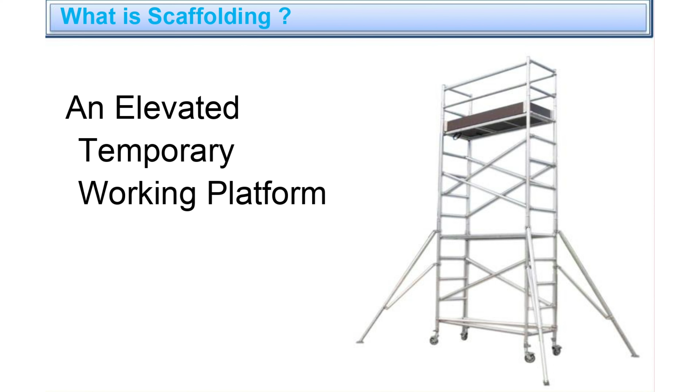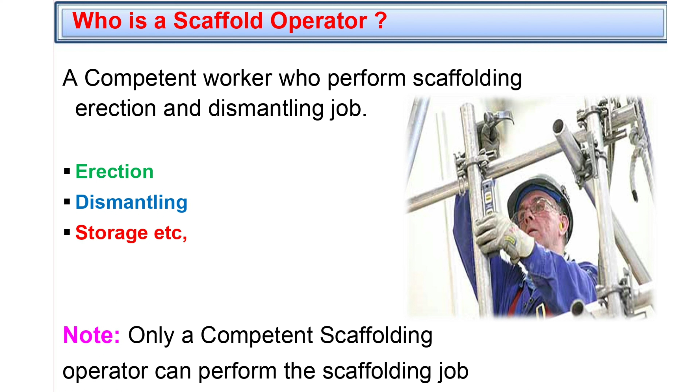Scaffolding training. What is scaffolding? An elevated temporary working platform. Who is a scaffold operator? A competent worker who performs scaffolding erection and dismantling jobs: erection, dismantling, storage, etc. Note: only a competent scaffolding operator can perform a scaffolding job.

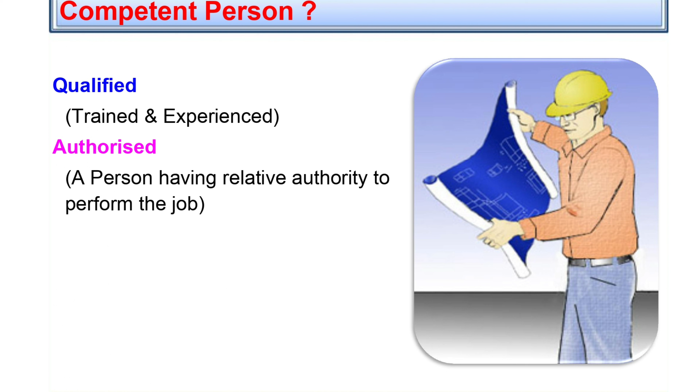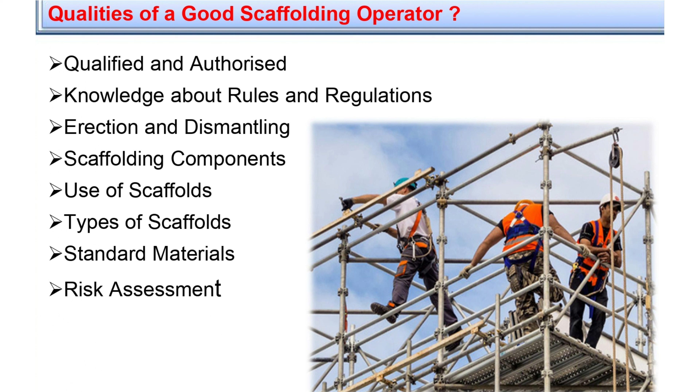Competent person: qualified, trained, experienced, authorized, a person having relative authority to perform the job. Qualities of a good scaffolding operator: qualified and authorized, knowledge about rules and regulations, erection and dismantling, scaffolding components, use of scaffolds, types of scaffolds, standard materials, risk assessment.

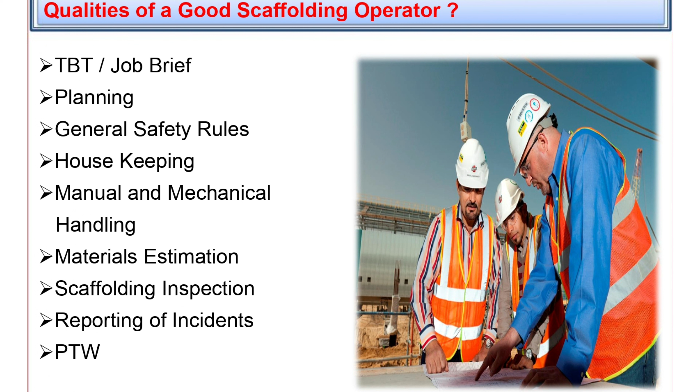TBT job brief, planning, general safety rules, housekeeping, manual and mechanical handling, materials estimation, scaffolding inspection, reporting of incidents, PTW.

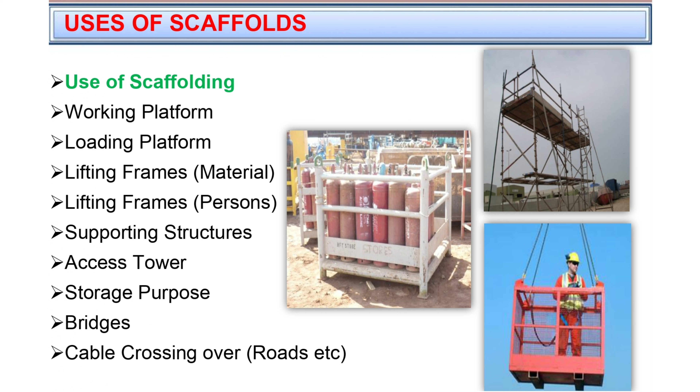Uses of scaffolds: working platform, loading platform, lifting frames for materials, lifting frames for persons, supporting structures, access tower, storage purpose, bridges, cable crossing over roads, etc.

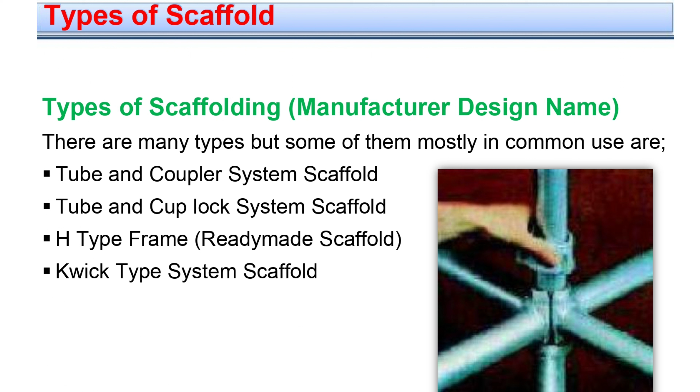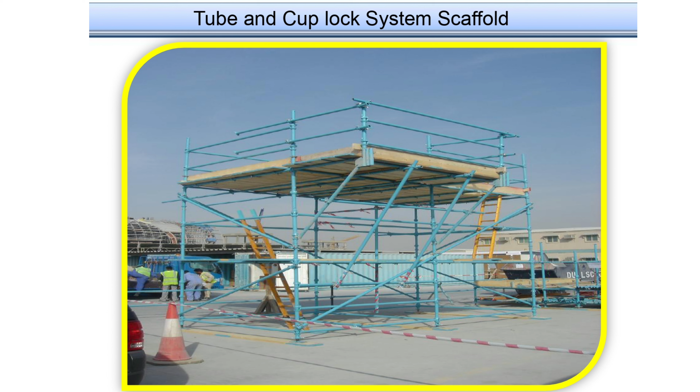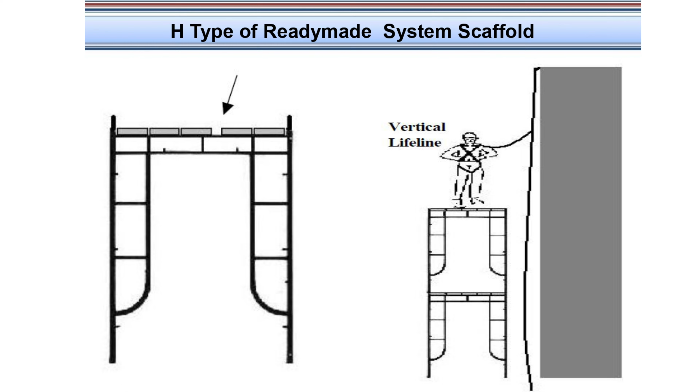Types of scaffolding, by manufacturer design name. There are many types, but some of the most common are tube and coupler system scaffold, tube and cup lock system scaffold, H-type frame ready-made scaffold, Kwick type system scaffold, tube and cup lock system scaffold, Kwick type system scaffold, H-type ready-made system scaffold.

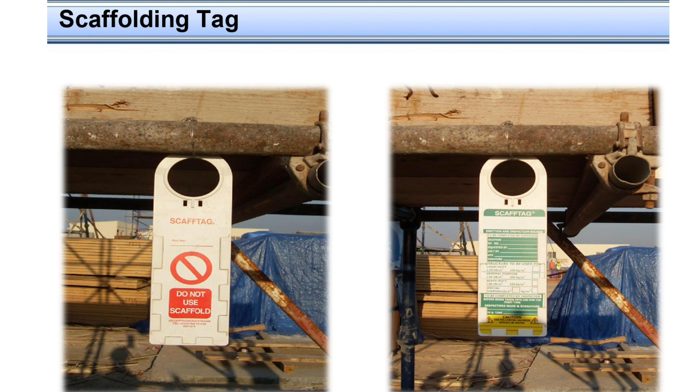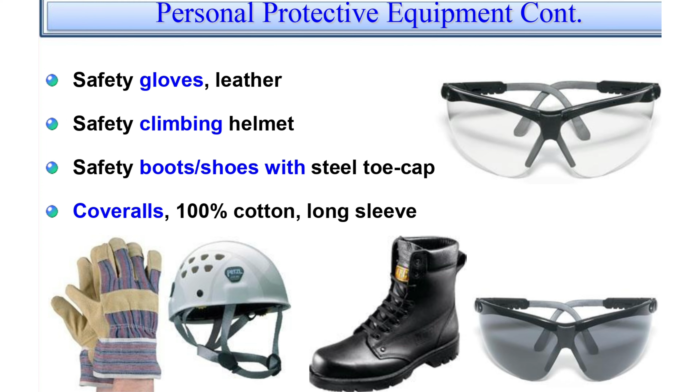Scaffolding weight. Scaffolding tag: red tag, green tag. Personal protective equipment: leather safety gloves, safety climbing helmet, safety shoes with steel toe cap, 100% cotton long-sleeve coveralls, ear protection, clear or shaded safety spectacles, tool pouch with appropriate tools. Fall protection: safety harness and fall arrestor.

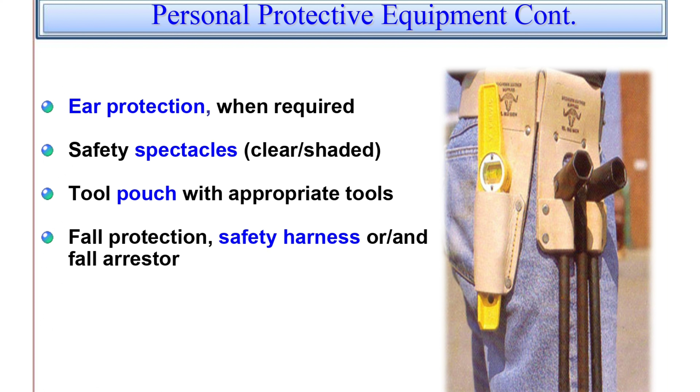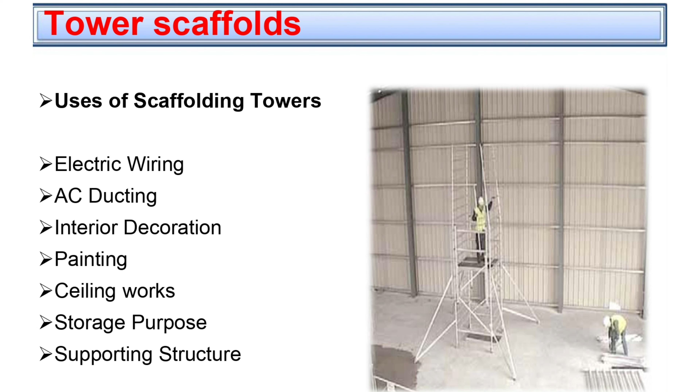Tower scaffolds. Uses of scaffolding towers: electric wiring, AC ducting, interior decoration, painting, ceiling works, storage purpose, supporting structure. Erection and dismantling: user manuals, which include the sequence of erection and dismantling, bracing, stabilizing requirements, ratio 1:4, PFAS, lifeline, fall arrestor, raker system.

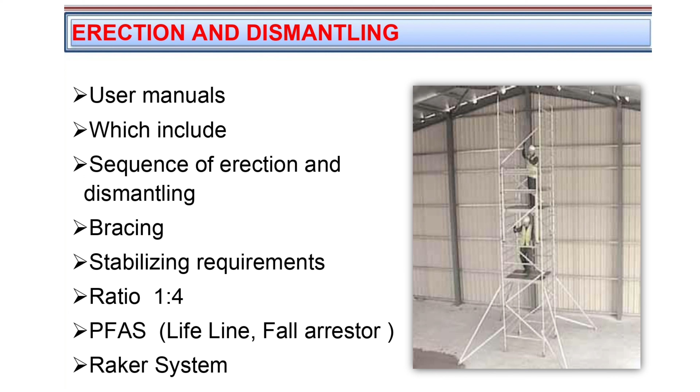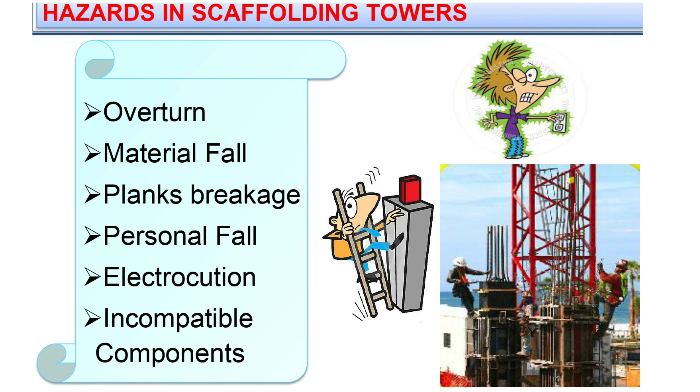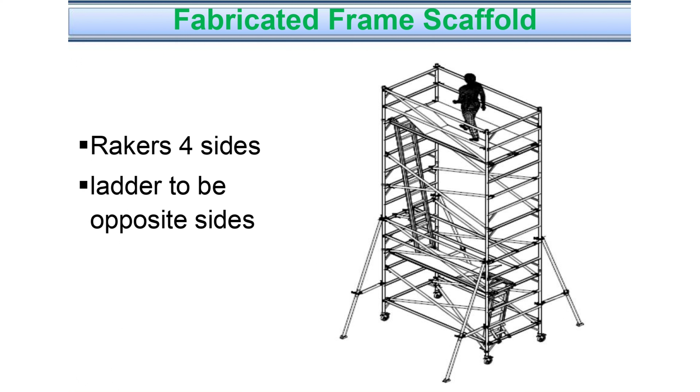Hazards in scaffolding towers: overturn, material fall, plank breakage, personal fall, electrocution, incompatible components. Fabricated frame scaffold: rakers 4 sides, ladder to be on opposite sides.

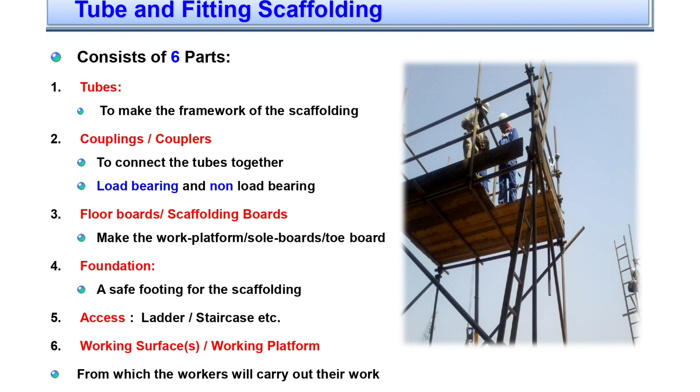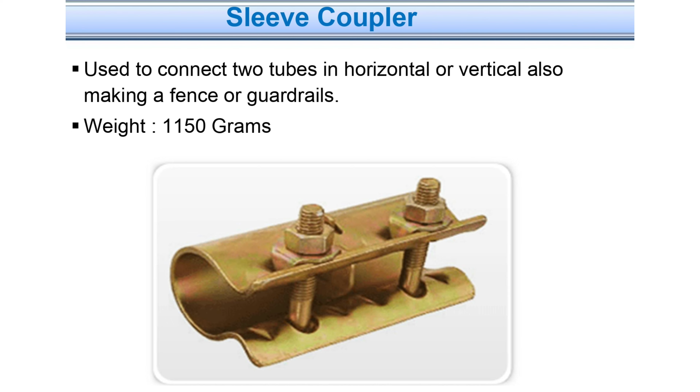Fixed right angle double coupler. Sleeve coupler, used to connect 2 tubes horizontally or vertically, also for making a fence or guardrails. Joint pin coupler, used to connect two tubes horizontally or vertically, also for making a fence or guardrails.

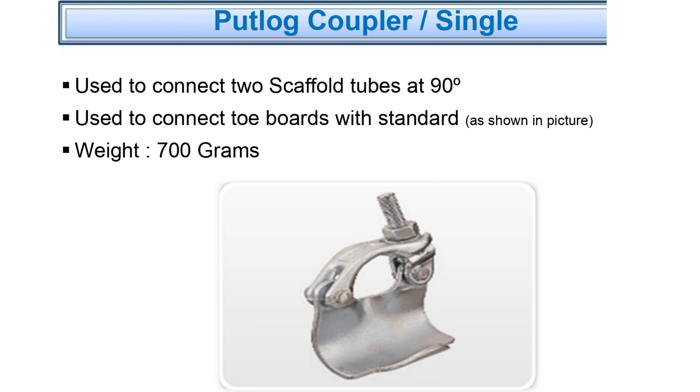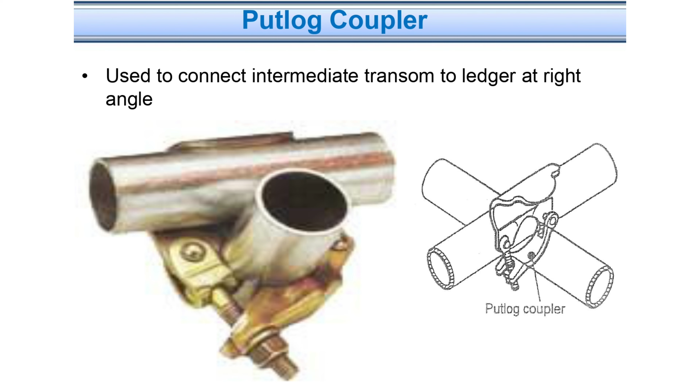Putlog coupler, used to connect two scaffolding tubes at 90 degrees, used to connect toe board with standard. Toe boards connected with standard. Putlog coupler, used to connect intermediate transom to ledger at right angle. Ladder clamp, used to connect a ladder to the support tube in scaffolding.

Scaffolding couplings: girder coupler, for connecting scaffold tubes to H-girders. Units must fix to girders in pairs. Refer to the manufacturer's recommendations for loading. SWL when used in pairs is 1.25 tons.

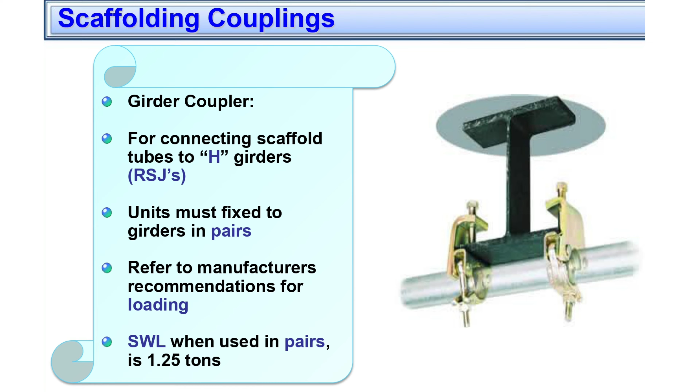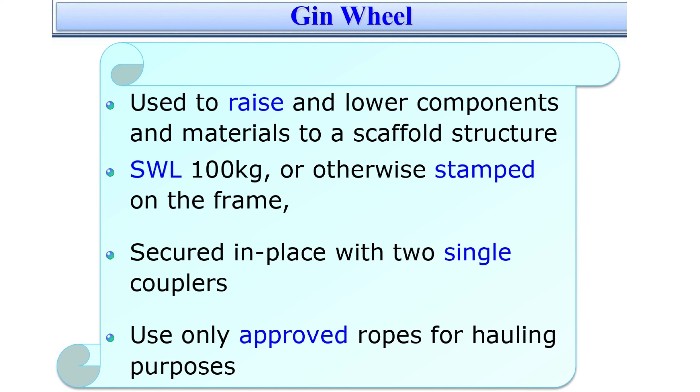Gin wheel, used to raise and lower components and materials to a scaffold structure. SWL 100 kilograms, or as otherwise stamped on the frame, secured in place with two single couplers. Use only approved ropes for hauling purposes. Board retaining coupler, BRC, used to connect scaffold boards with the tubes.

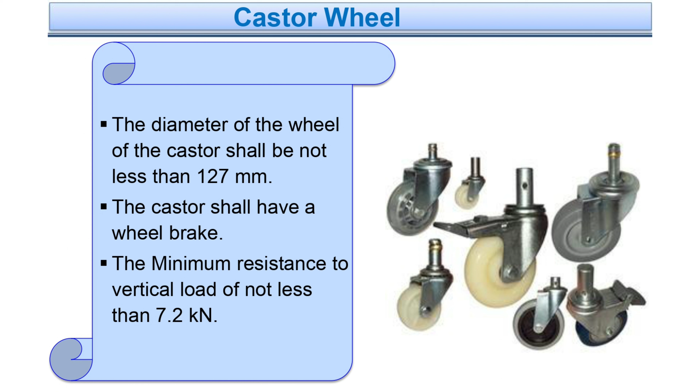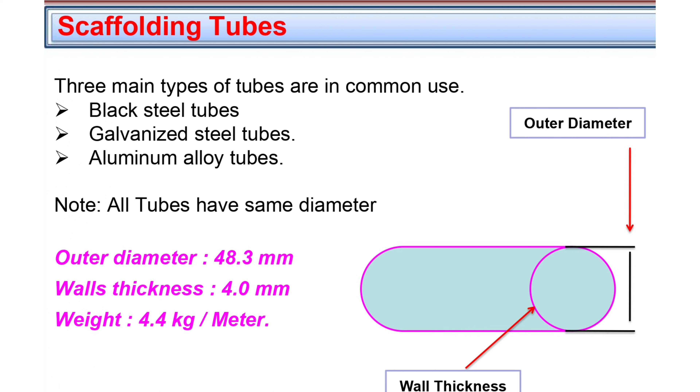Castor wheel: the diameter of the castor wheel shall be not less than 127 mm. The castor shall have a wheel brake, and a minimum resistance to vertical load of not less than 7.2 kN. Scaffolding tubes: three main types of tubes are in common use: black steel tubes, galvanized steel tubes, aluminum alloy tubes. Note, all tubes have the same diameter.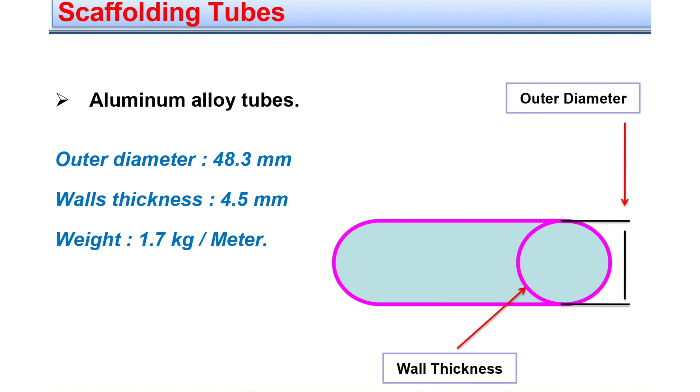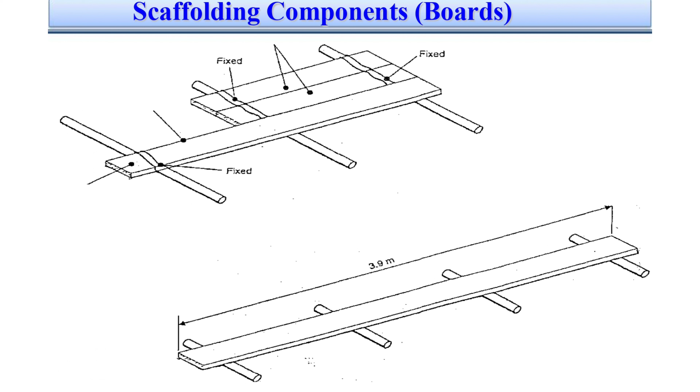Scaffolding components: boards. Usually the boards are made of wood called timber, that is why they are called timber boards. What is wrong here? Common faults in scaffolding boards.

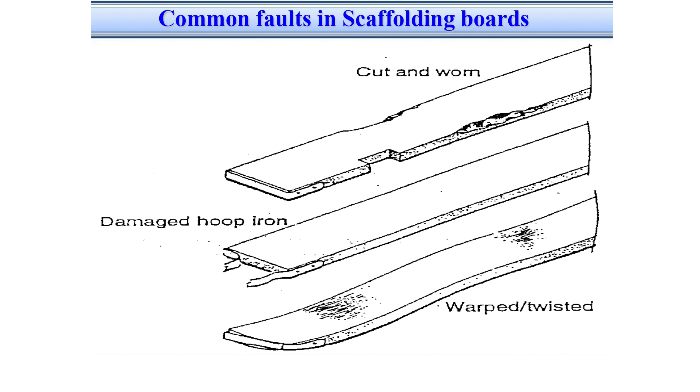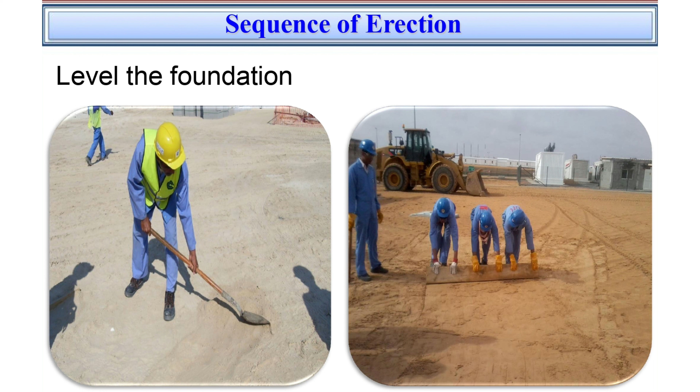Scaffolding toe boards. What is wrong here? Sequence of erection. Level the foundation. Base jack, sole board, base plate. Shank, base jack.

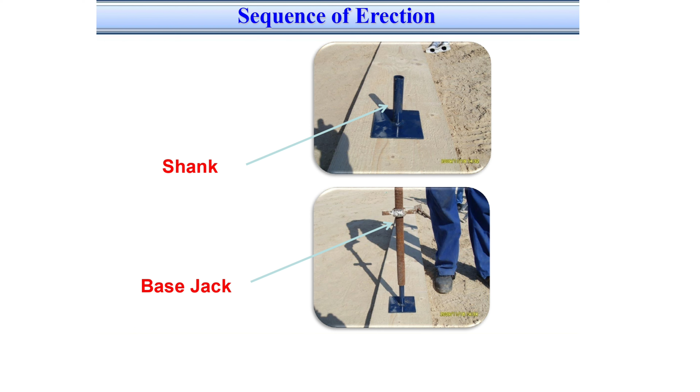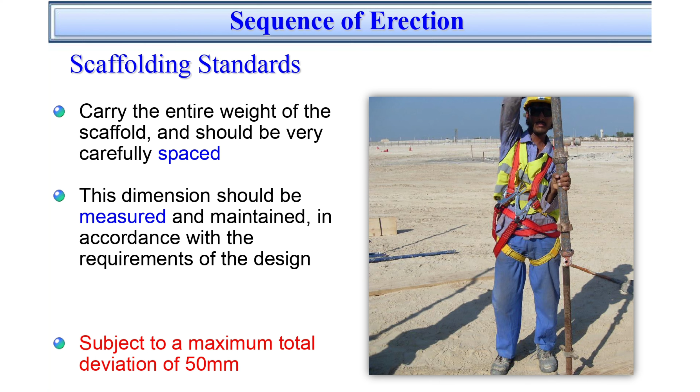Scaffolding standards carry the entire weight of the scaffold and should be very carefully spaced. This dimension should be measured and maintained in accordance with the requirements of the design, subject to a maximum total deviation of 50 mm. Ledger.

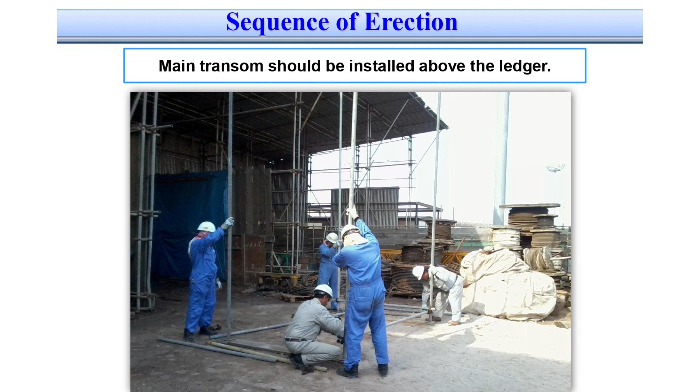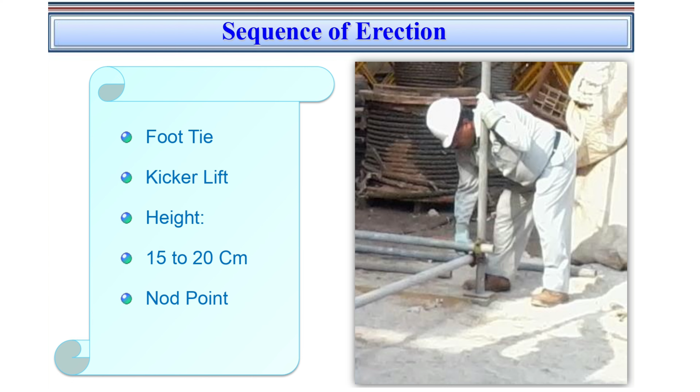Main transom should be installed above the ledger. Putting the main transom on fixed one, for correct matching. Foot tie, kicker lift, height 15 to 20 cm, node point. Fix the ledger over the earlier fix to match the correct position.

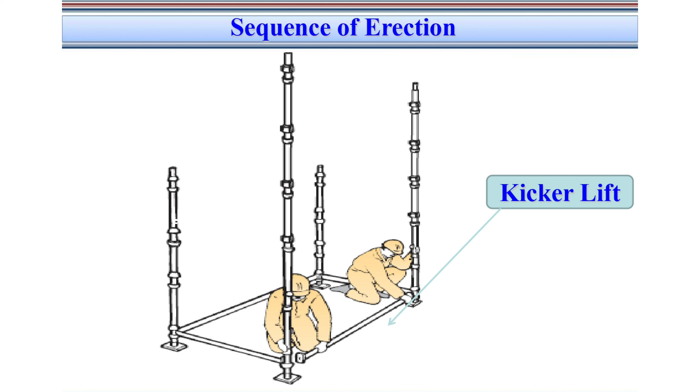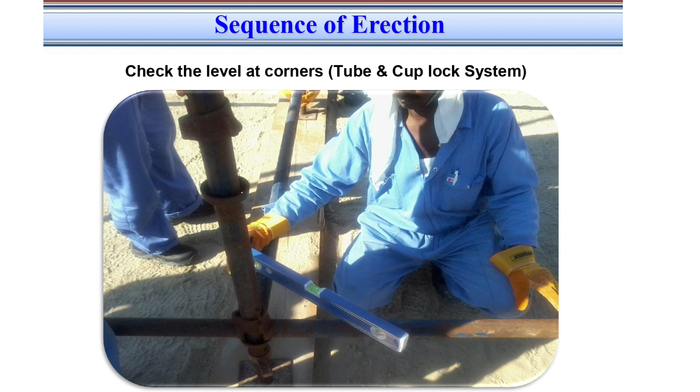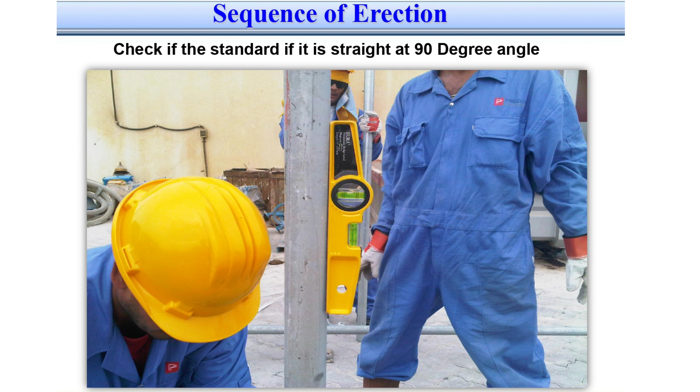Kicker lift. Maintain the foot tie height. Check the level at foot tie. Check the level at corners, tube cup lock system. Check if the standard is straight at a 90-degree angle. Alignment of standards.

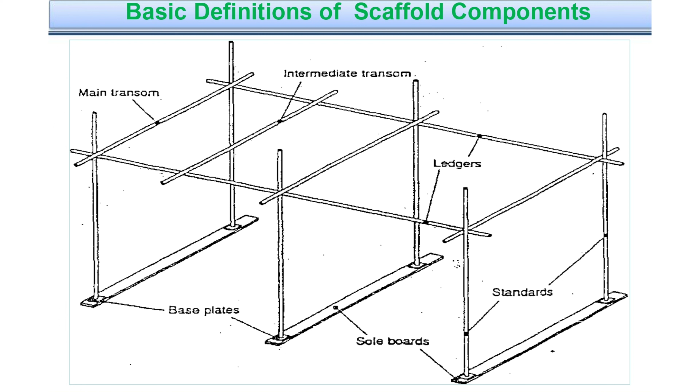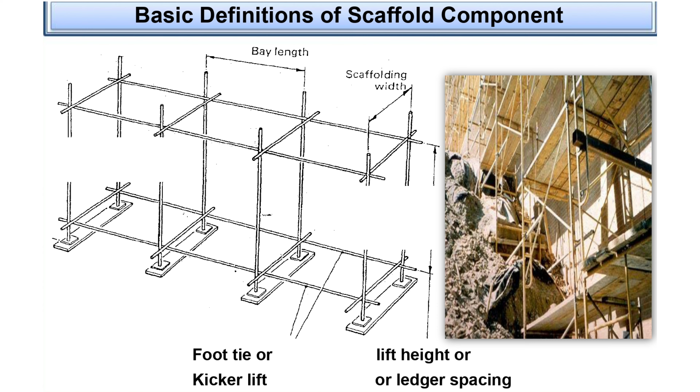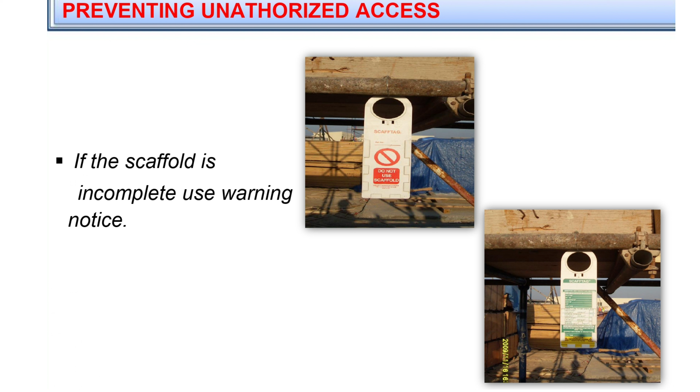Basic definitions of scaffold components: sole boards, base plates, standards, ledgers, main transom, intermediate transom. Distance between the foot tie and first lift should be 2 meters. Preventing unauthorized access: if the scaffold is incomplete, use a warning notice. Scaffolding ties.

Guardrail, approx 1 meter high, brick guard. Intermediate guardrail, max gap of 470 mm, toe board, scaffolding planks, deck area minimum of 600 mm wide, transom, sway brace, ledger brace, couplers at joints, ledger, standard, base plates, sole board, positive through tie, reveal tie.

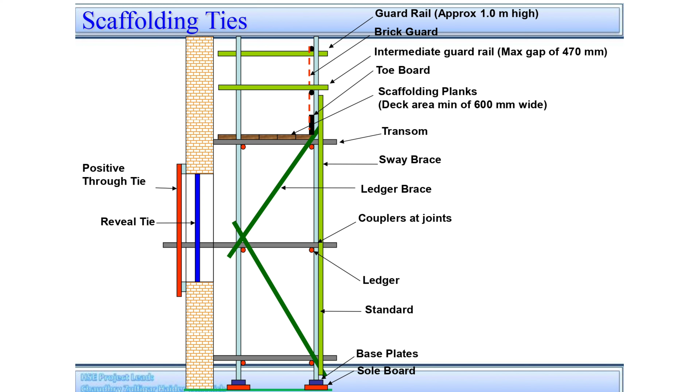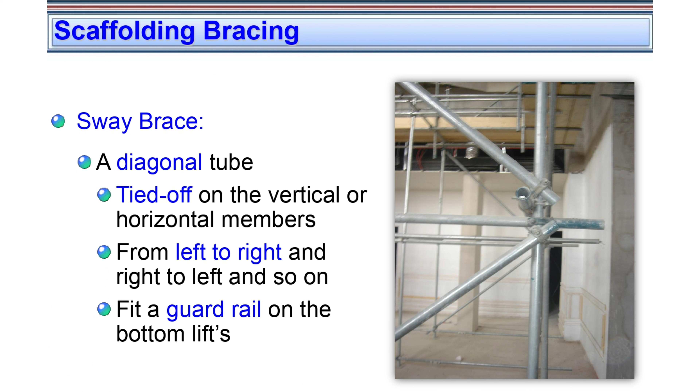Scaffolding bracing: sway brace, a diagonal tube, tied off on the vertical or horizontal members, from left to right and right to left and so on. Fit a guardrail on the bottom lifts.

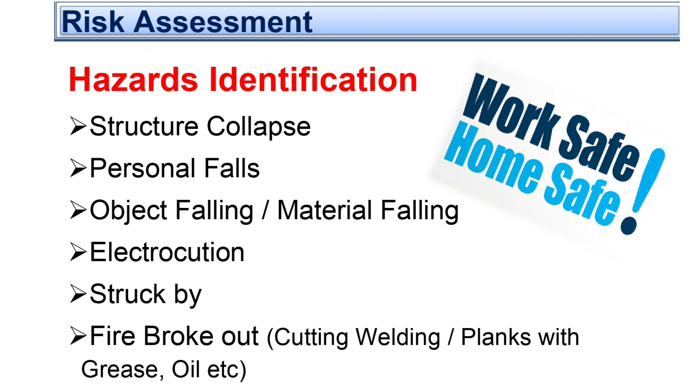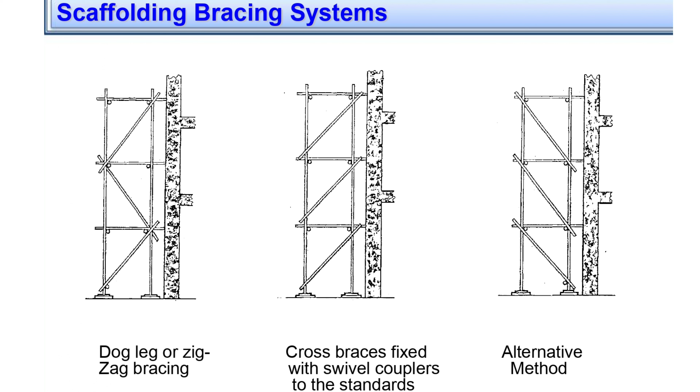Risk assessment, hazards identification: structure collapse, personal falls, object falling, material falling, electrocution, struck by, fire broke out, cutting, welding, planks with grease, oil etc. Scaffolding bracing systems: dog leg or zigzag bracing, cross braces fixed with swivel couplers to the standards, alternative method.

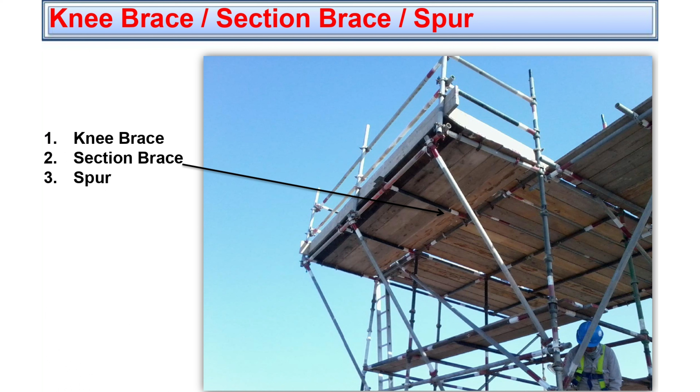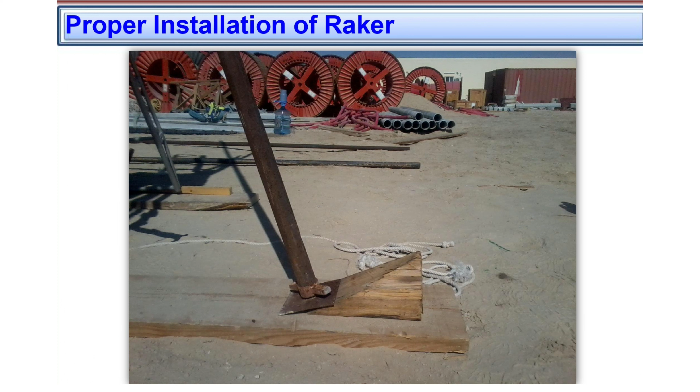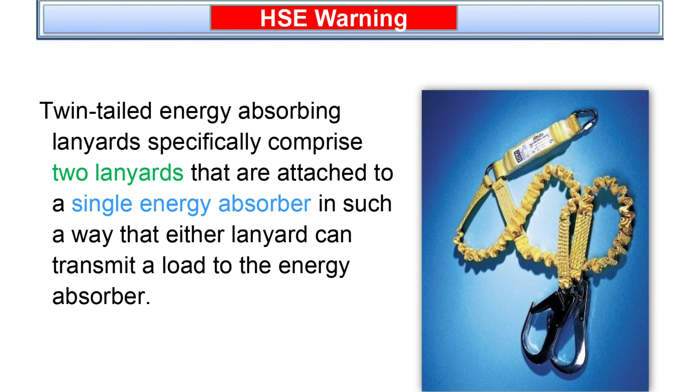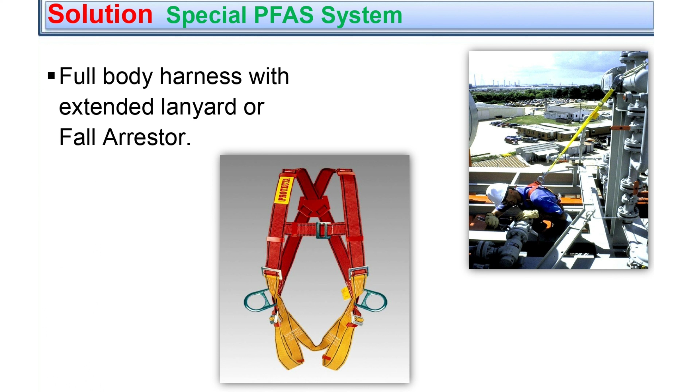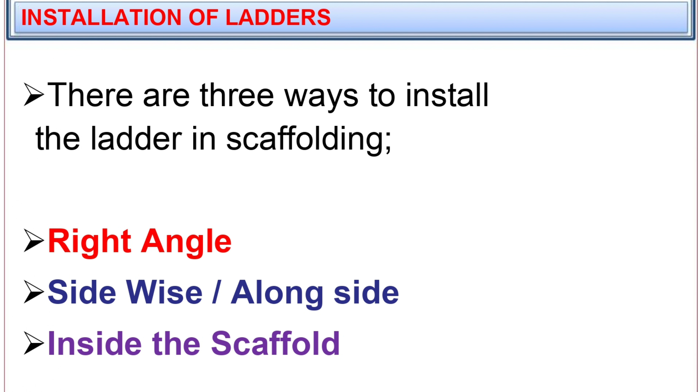Installation of ladders. There are 3 ways to install the ladder in scaffolding: right angle, sidewise alongside, inside the scaffold. Gangways and working platforms should ideally be horizontal, but may go up to 20 degrees without cleats; if steeper, cleats and guardrails should be installed.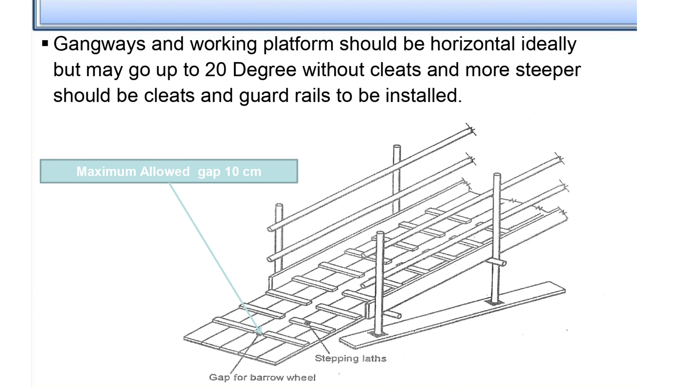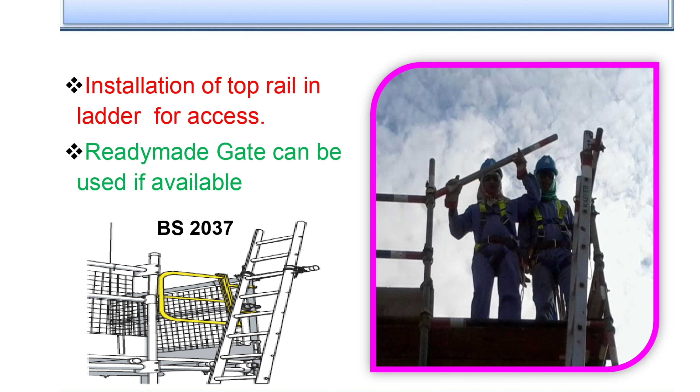Installation of ladder. Angle should be 75 degrees, ratio 1:4. Installation of top rail in ladder for access. A ready-made gate can be used if available. Ladder safety: always put ladders against the width side and inside if possible. Angle 75 degrees. Ladders must be lashed at 2 points at least.

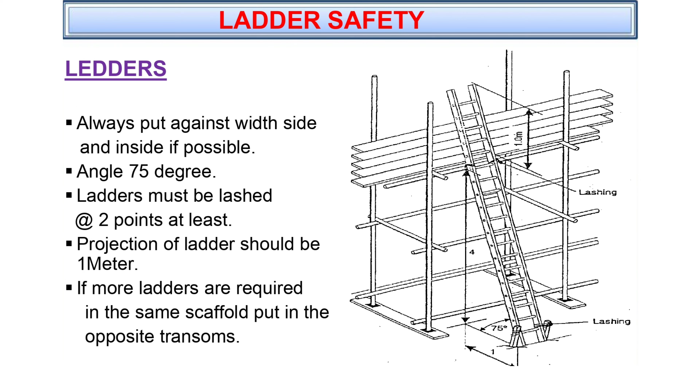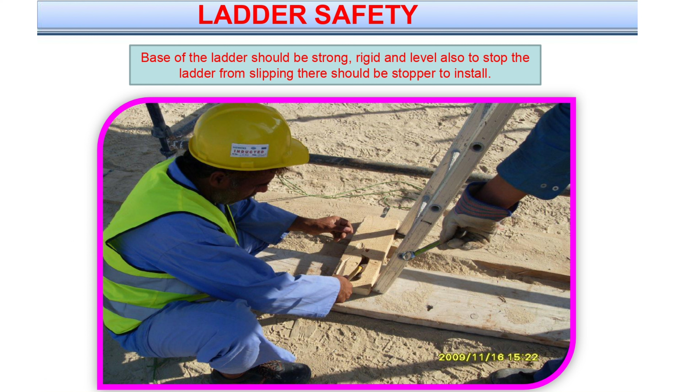Projection of ladder should be 1 meter. If more ladders are required in the same scaffold, put them in the opposite transoms. Base of the ladder should be strong, rigid, and level. Also, to stop the ladder from slipping, a stopper should be installed. Ladder clamp, used to connect the ladder to the support tube in scaffolding.

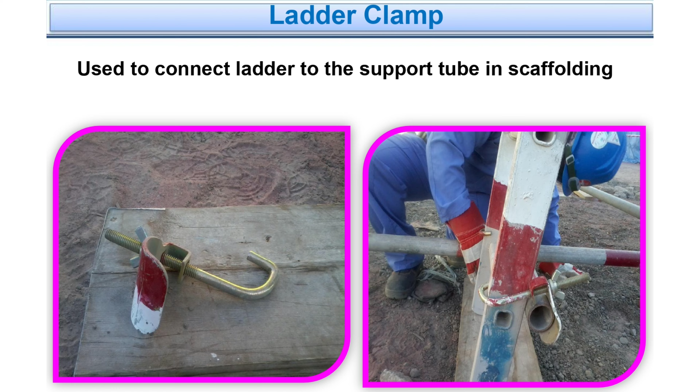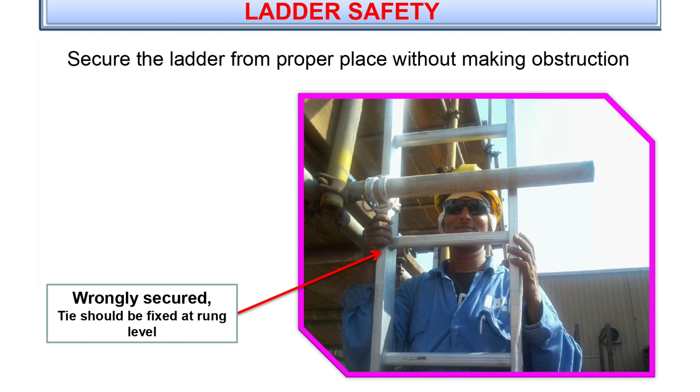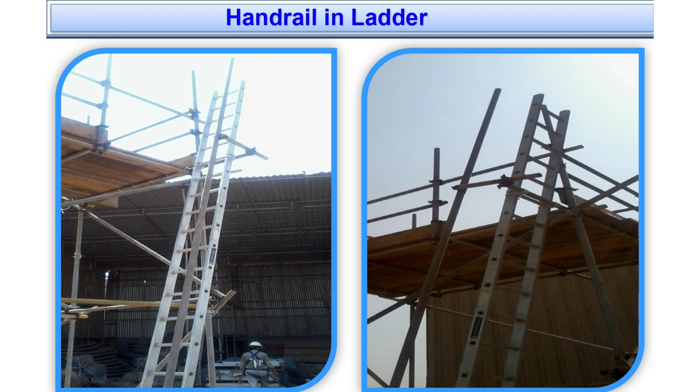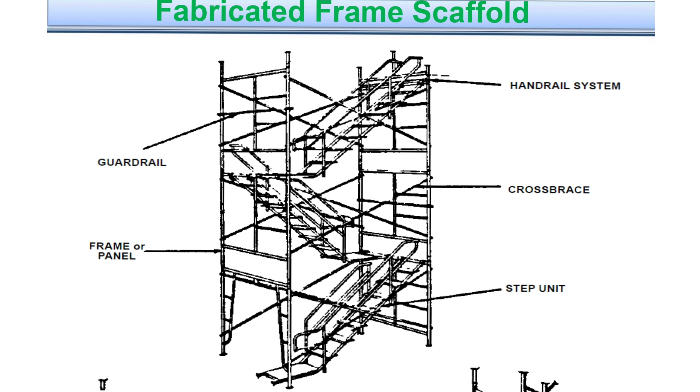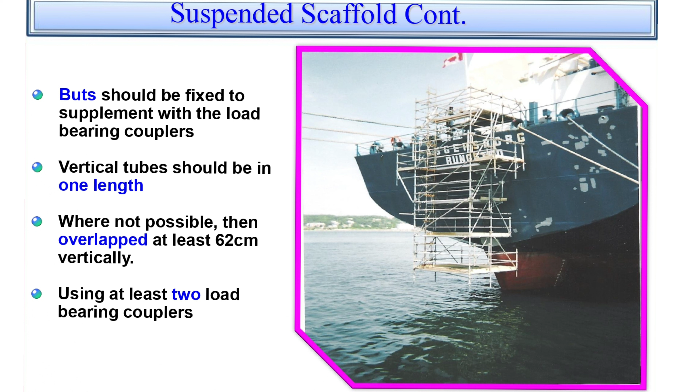Suspended scaffold, Buts should be fixed to supplement with the load-bearing couplers. Vertical tubes should be in one length; where not possible, then overlapped at least 62 cm vertically, using at least 2 load-bearing couplers.

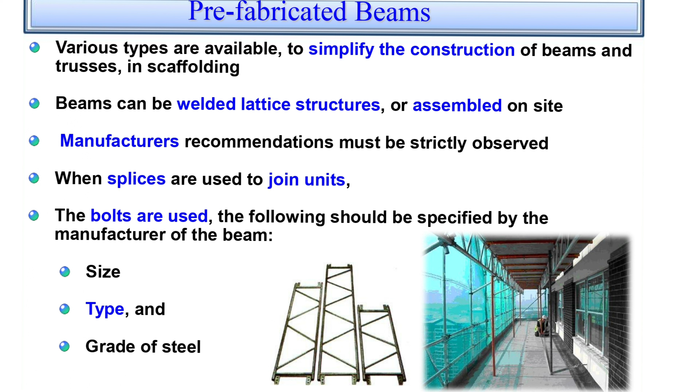Prefabricated beams: various types are available to simplify the construction of beams and trusses. In scaffolding, beams can be welded lattice structures or assembled on site. Manufacturers' recommendations must be strictly observed. When splices are used to join units, bolts are used. The following should be specified by the manufacturer of the beam: size, type, and grade of steel.

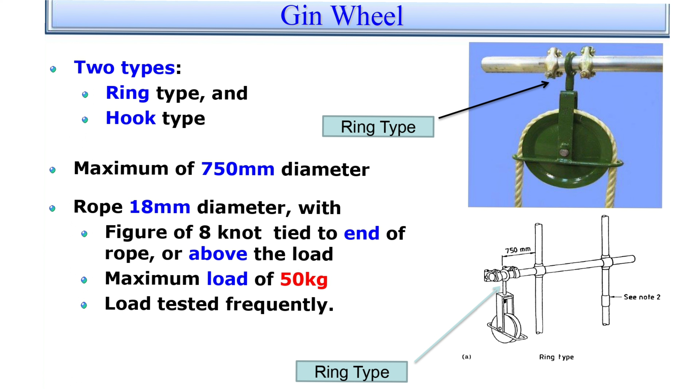Gin wheel, 2 types, ring type and hook type, maximum of 750 mm diameter, rope 18 mm diameter, with figure of 8 knot tied to end of rope, or above the load, maximum load of 50 kilograms, load tested frequently. What are your new observations?